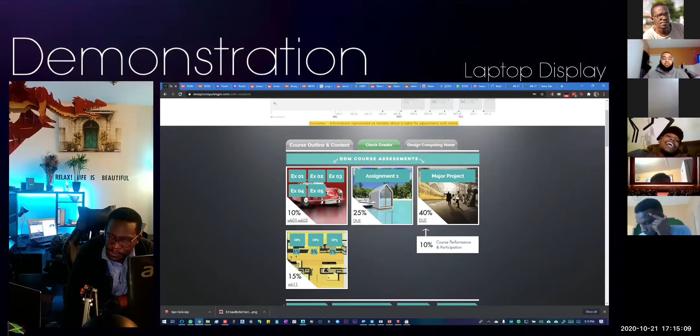Let me close some files here. I want you guys to open the class website. You guys with me? Yes sir. So if we take a look at the class website, and we're going to scroll down here, let's scroll down. I think it's on, yeah, it's under unit 3.

And we have some interesting sketches here. This is what we used in the previous year. Every year we keep adding a new one, so this year I added another one. And here it is, I want to show you guys this sketch. This is my new favorite sketch.

Now, why I love this is this accurately represents a quick sketch, something that you would whip up. Maybe you're conceptualizing an idea or something real quick in your design studio. It could just be some kind of work. I'm sure many of us have sketches like this, not necessarily of the same building, but you probably can quickly just mass up an idea real quick.

Now what I'll be showing you how to do is how to do a 3D sketch from an initial sketch using SketchUp, right? And then we're going to look at how we can reuse that sketch for maybe some of your interims, or to actually put on your final sheet when you want to illustrate the concepts that you went through.

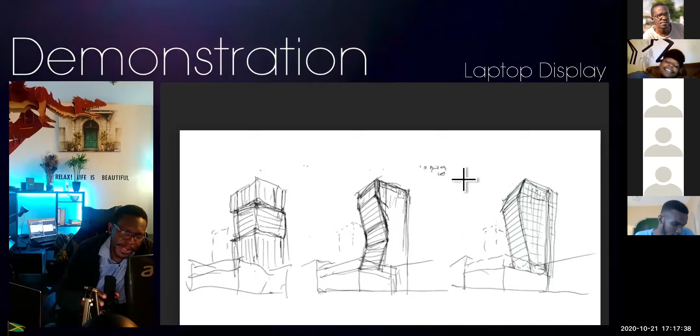So you guys aren't going to draw the model, because we're just going to use this sketch as is, sorry, so you guys are not going to do a sketch. We're just going to use this sketch as is and create a 3D sketch from this hand-drawn sketch. So what I want you guys to do is to open up SketchUp. Now, it's best that you use the Pro version for what we're going to be doing.

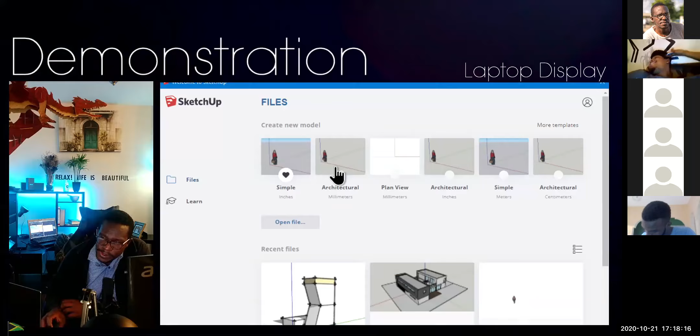So when we open up SketchUp, we'll go to architectural. Let's work with architectural millimeters.

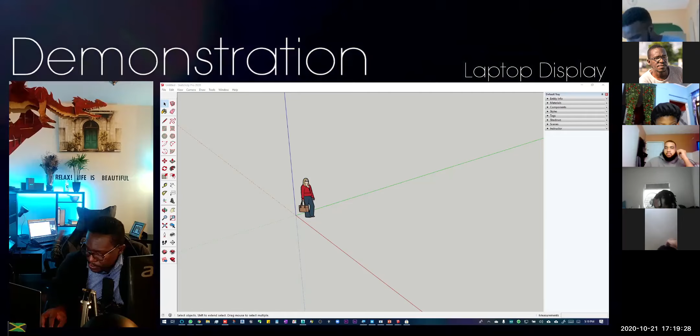Now let's take a look at our image. I'm going to open that up. Let's see... Desktop... Okay, here's the image. Let's put that over here.

Now, we're gonna try out this one, the one at the end this time. Let me use the other app for browsing that, the Windows Photo app. All right, so we're going to try out this one here. And what we're going to do is create a 3D sketch from this.

So I'll give you a minute to just open up SketchUp real quick.

Sir, what is Style Builder? Something like SketchUp? We're going to know that answer in a short while. We're going to look at style.

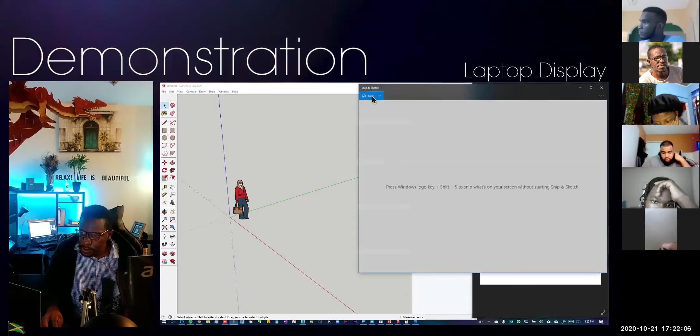No, not you. Okay. Now, when you open that up, the first thing we're going to do is a quick 3D sketch. Hang on one minute.

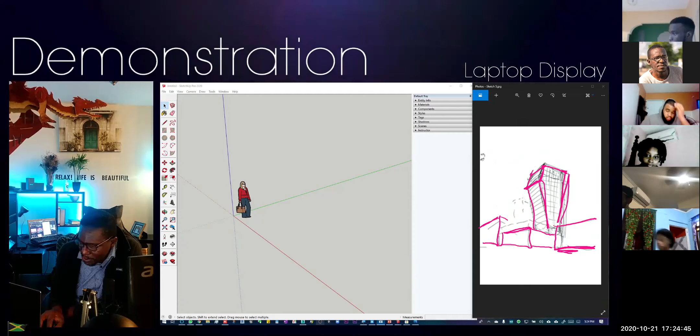And what I'm going to do to start off the sketch is use the rectangle tool. Let's say I'm going to do this box first, using my rectangle tool. Let's just clear that last one. Right, I'm just going to use my rectangle tool.

And this looks like this building is about so. And based on the height of this person, I'm going to use my push-pull tool, which is located here, to push it up. So this is about maybe...

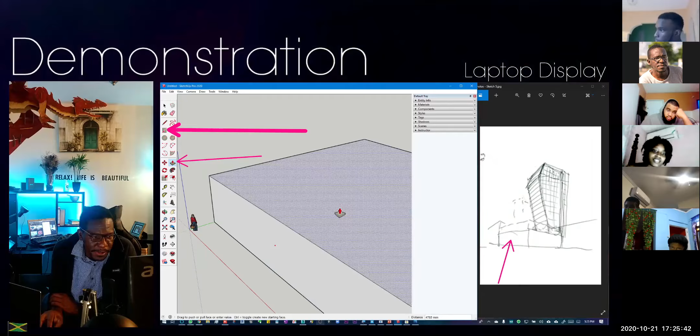Your screen is a bit small. Oh, it is small? It shouldn't be small, I didn't share my screen. Yes, I did. Oh, you mean... okay, let's go full screen. That's better? Yes sir. Right, plus I can zoom, right? So I use the push-pull tool here, right? No need to see my ugly face, right?

So what's the size of the base that you mean? Or just a random thing, that's the size? There is no size, look, we're doing it from a sketch.

So this technique that I'm showing you is: if you have an initial sketch for your concept, just a volume, just a massing, I want you to try out converting that sketch into a 3D sketch so that you can further explore your design options.

There's some people who do this and then they print it out again and sketch on top of it and create another 3D sketch and print it out again. And that's the process they use to come up with a design. You guys are going to have your own individual approach to this. So I'm just showing an option that you can build off of.

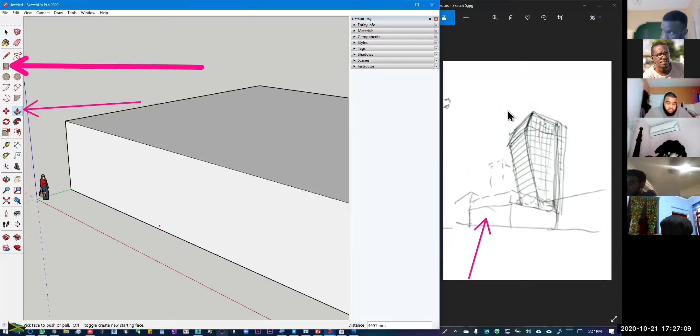So that's the first thing I created, the base here, right? And this is just an estimation. Now next, I'm going to create this building over here, that's this one over here. And I'm going to do that by drawing another base.

So I'm gonna, notice, just hover on the edge right here. Just kind of hover right here. So notice I'm getting that red line, that tells me that it is in line. And according to the sketch, it looks pretty close. I'm gonna start there and probably go to about maybe like here.

And this one is definitely taller. So I'm gonna use my push-pull tool and make this taller, about maybe that. So you can kind of see we're starting to look like our sketch already.

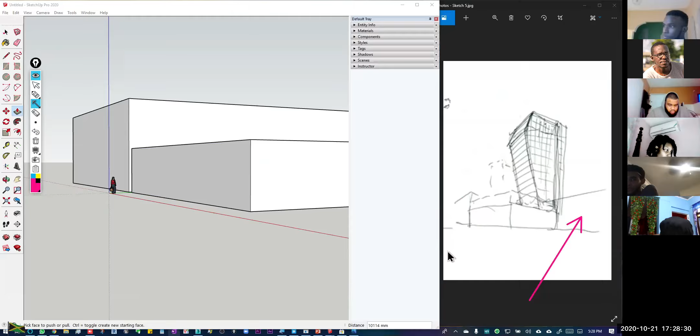Next, I'm going to work on this one here. And that's another box, but let's use another method. What I want us to do is copy one box to another.

So I'm going to just use my... So how did you do that thing again, where you ensure it's in the same path, same line as the other? You hover over the point that you want it aligned with. So I'm going to show you that.

So this time around, I'm going to actually copy this box. Let me just select this box here. I'm going to copy this box, and we're going to use the typical Control-C, Control-V. And paste — and what do you know, you have another box. Now, you're asking about the aligning thing.

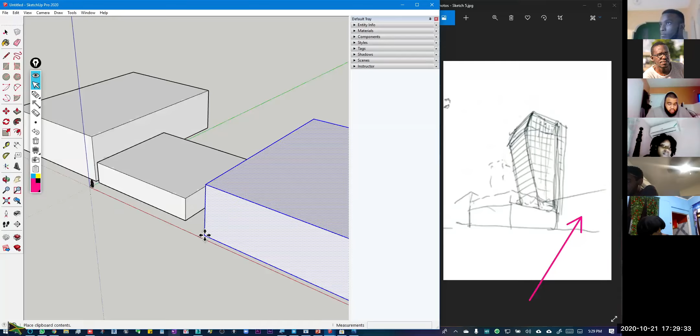Now, if I want to align this, what I'm going to do is hover over this point. Don't click, just hover over it, then slowly pull it away, and it will give you the line. So I'm going to put this about here.

It looks like this side is further away. This building is definitely not so tall, so I'm going to use the push-pull tool like that, and push it down till about there. So you can see that we're starting to look like this.

Now let's look at this building here that we sketched out. Remember, all of this started because we have an idea of how tall the building is, because we use this person as an estimate. And then we just use our own sketch as an estimate to get the positions of these, right? Remember, it's a 3D sketch, so we just need to be proportionally reasonable. Let's put it that way.

All right. Now let us work on this guy now. Of course, we don't know what's happening behind here, right? But let's assume the base of this starts from around here. So I'm going to draw a base like that.

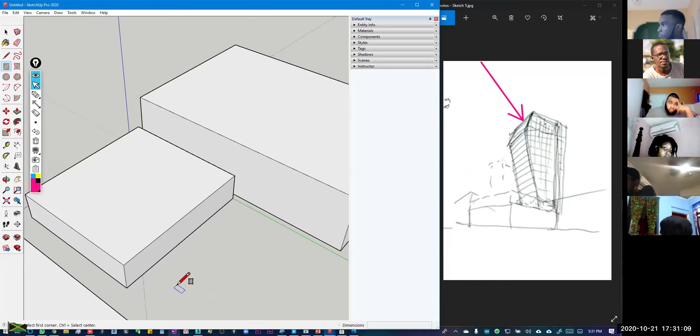I'm going to do a push-pull, but I'm going to now extend this by another push-pull into here. So maybe that's the base — I don't know, I'm just doing a rough estimate. And then from here now, we want to start extruding upwards, so we're going to push this all the way up like that. So essentially we start having our tower like that.

Now naturally, you can see that the tower has that kind of shape, so we basically need to be cutting something out of it like that in order for it to start looking great. So there are a couple ways to do that. I'm going to show you one way.

One way that you could do it is by using your pencil tool. Let me just respond to this.

I'm telling Miss Oti that you guys are still alive.

All right, so one way that you could do this is you could draw a line from here. Let's estimate it till about here. And that line would be represented — pretty much that line there.

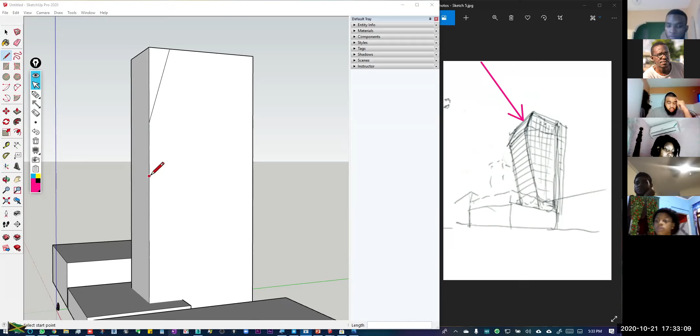She's saying that she's supposed to give you guys some links, Miss Oti. Is that so? Don't know, sir. No? I don't know.

Okay, all right, let's finish this.

Now, we would want to start the base from here. Now, this is where we start going into the unknown of our sketch, right? Because we just kind of sketched this out, we don't really know what's happening behind here. Because we're sketching it in 3D, we're forced to figure that out, which is a good thing because it helps you flesh out your design. So I'm going to join this line to here, and there we have our kind of sketch there.

Then what we want to do is perhaps get rid of here. Sketch this out — ideally we would want to get rid of that, and get rid of that. You guys following me so far? Yes, sir. No, sir, go ahead.

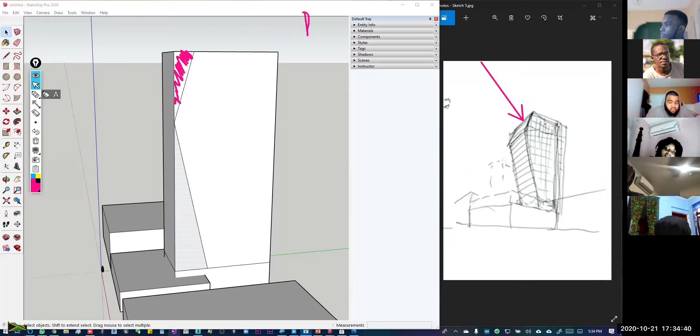Yes, sir. So one way how we could do that is we could use our push-pull tool again, right? And remember that is this tool right here.

And we can actually grab this edge here, and just like how we would push it this way, we can actually push it inward until it cancels out itself. By the way, this looks kind of nice, this kind of shape here. You know what? I like it. I'm just going to make it stay. But I'm going to cut the top by pushing it all the way over here like that.

And that's the beauty when we try to sketch out a sketch that we've done. In doing it, we kind of discover other interesting things that we can do at the same time. So it looks like we have a kind of elevator shaft business happening on the right-hand side. So let's drop that in.

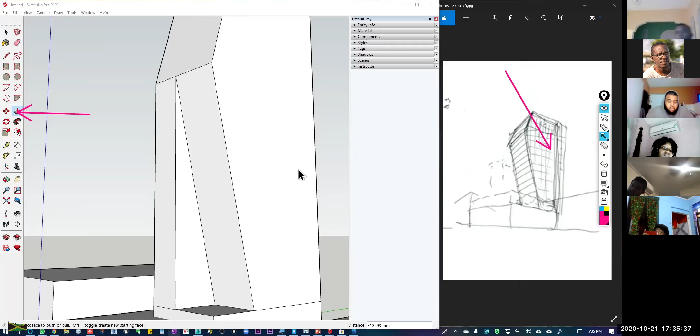So to do that, we could go for the rectangle tool, but why use a rectangle? Let's use our circle tool to make it interesting. I'm going to just draw a circle like that. And then we're going to use the push-pull tool again and just push this up. So that's pretty interesting.

And there you have it. It's basically sketching out something from a 2D sketch that we didn't know what's happening for the other sides, but in sketching it out, we were able to visualize it a bit better. We can look around the back, and then we can start to explore other things.

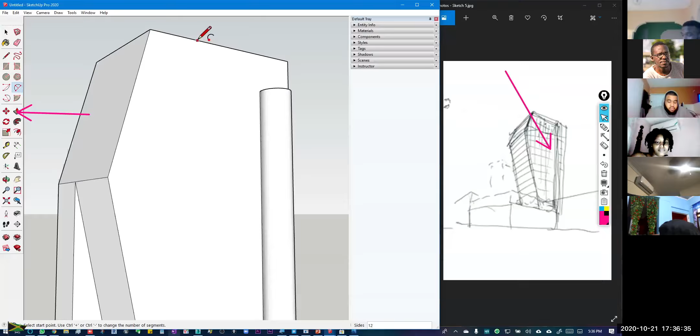For example, suppose we wanted to curve this edge here. We could use like a 3-point curve. You don't have to follow what I'm doing. I'm just kind of highlighting a nice way that you can start to explore your design by doing a 3D sketch. We could do an interesting thing like that.

Now it starts to look kind of like some kind of Iron Man transforming headquarters. Or, look, it looks like Squidward's house in SpongeBob.

Oh, all right. But you can really, just by doing some basic drawings, for example, we could just draw this back up to this point here. And we could draw this around there. But we can really start to explore some interesting shapes because we created a 3D sketch from this.

And this is one of the reasons I love SketchUp, is because you can do this so quickly without having to exert much effort in doing this, right?

Now, for the assignment, you won't be needing to do a 3D sketch necessarily. So I'm just going to move right into what you will be needing to know. This was just like a bonus item to you guys, right?

Now, we are going to investigate another aspect of SketchUp, which is adding materials. So if you notice this panel that you see here, which is called the tray, if you don't see the panel enabled, to enable it, you will go to Window, and then you're going to enable the default tray. See, it's a hide tray. So mine is shown, but if it wasn't shown, then I would have to choose Show Tray. So if you don't have it on, that's what you do.

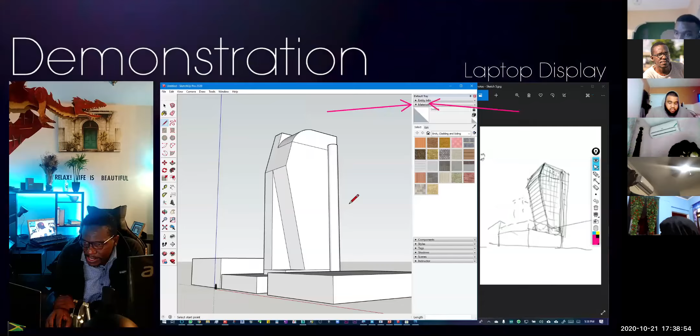And we are going to go to the Materials tab to expand that down. So from this 3D sketch, now we can actually start exploring colors and materials, even if it's just for diagrammatic purposes. So for example, let's say that this is some penthouse unit at the top, right? So we wanted to color it a color to say, okay, this is a private space.

Then what you would do when you go to your materials tab, you would expand this and you would go to colors, that's here. And you will see it pretty much shows the spectrum going from white to black all the way to white, and through the color spectrum of the primary colors. So ideally, you should be able to get any color range in this.

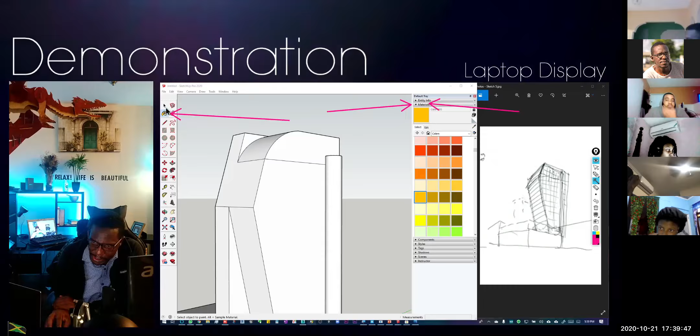So let's say we wanted to represent this as an orange. So we click orange, and then we go to our paint bucket tool, which is here. And when we go to the paint bucket tool, we simply just fill in the areas that we want to fill. And it's really as simple as that.

So if we wanted to color this section different, for example, if we fill this, all of this will be filled. But if we wanted to color this section different, we would go to our pencil tool, draw a line here, and then go back to our paint bucket tool and fill.

So that's interesting. Maybe you want to represent glass on one side. So we choose blue and we fill that with blue.

Remember, this is really a kind of a sketch, and it's kind of like you've come this far with the hand drawing and then you explore further with a sketch. And what some people would do, some people just print this out and then sketch again on top of this. You know, you would choose your own design method, whether you want to explore with your hands using a hand drawing tool, or you want to just convert to digital and continue exploring this in a digital way.

It's recommended that you have a 3D sketching option. Your options for doing that are SketchUp and FormIt - those are the two quick ones. It's not recommended that you use architectural software to do sketching. When you use a program like SketchUp, you're not worried about windows or doors just yet - you're really just considering proportion, massing, and volumes.

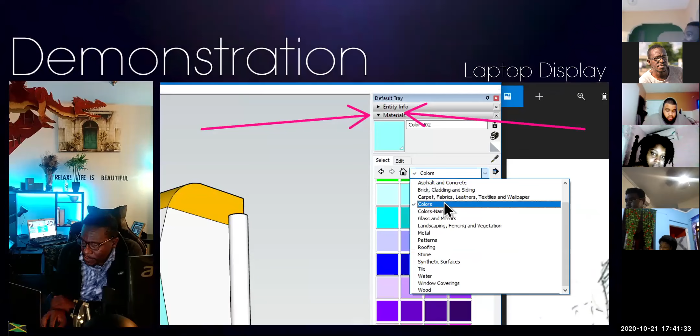So that is where you apply material, at least color. To apply material, you just change it to a material. These materials are built into SketchUp - if you're not seeing it, it's probably based on your version. So you could choose tile, for example, choose that type of tile, and then fill a surface with it.

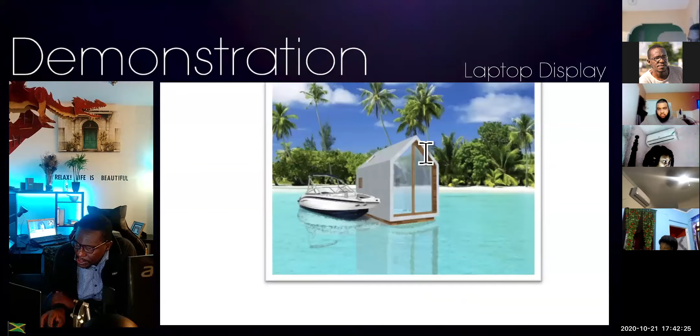If you take a look at the assignment, you will notice that in the final production it does have material. Let me get you a bigger picture - go back to the website and click on assignment 1. There we go, actually I can show you on the cover page - notice it has material here. So you guys will be needing to add material as well.

And that is how you would apply materials. Ah, come on. Hold on, this thing just slightly froze a while ago because I pressed a button. Come on, oh Lord. It's coming back, it's coming back - just let it do its thing. Sometimes when I have a lot of stuff open and I switch to multiple desktop mode in Windows...

If you want to, for example, move one of the rectangular members, can you shift it? Well hold on, we're coming to that. Three buildings - can you shift one of them to the side? We are coming to that in the latter part of our practical.

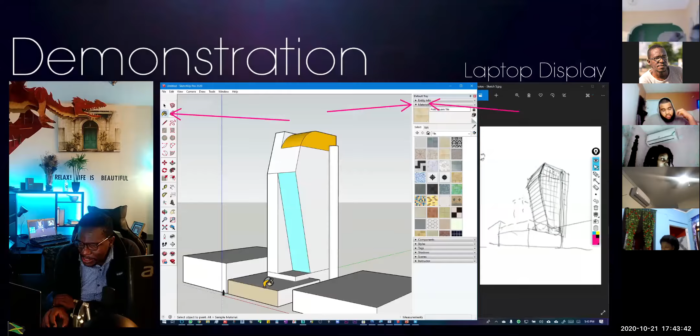Right, so this is the application of materials. Now if you wanted to apply your own materials, you would go to edit, and you will see from editing you're able to select a color. Let's say I wanted a weird shocking color green - you can see it applied there. Then what you can do is save this as a new material by clicking the create material button.

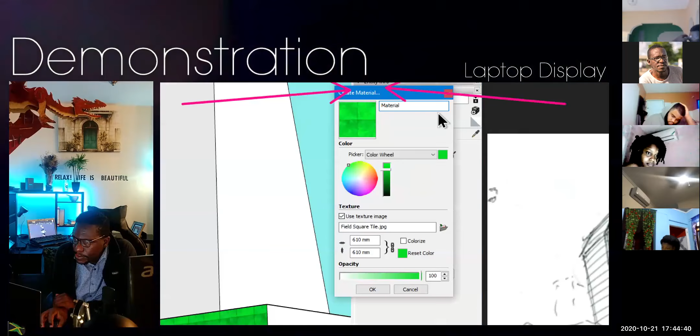Now, you can also pipette materials like in Photoshop. In the materials tab, notice you see a pipette icon here. When I click this, I can actually absorb this material and then apply it elsewhere. So that is pretty interesting - that's what you can do there.

So that is material in a nutshell. In a hard and fast way, you can quickly apply materials to your model - maybe you want to color code private and public spaces, or represent a particular room or circulation. It's up to you. Now another important aspect you'll need to know to finish your assignment is the styles menu.

There's a lot of stuff in SketchUp, but I'm only going to show you a few. Go to styles here. Now if you expand styles, you will notice a bunch of options for ways that you can represent the model, right? This is where SketchUp begins to shine - for example, I could pick from a list of styles.

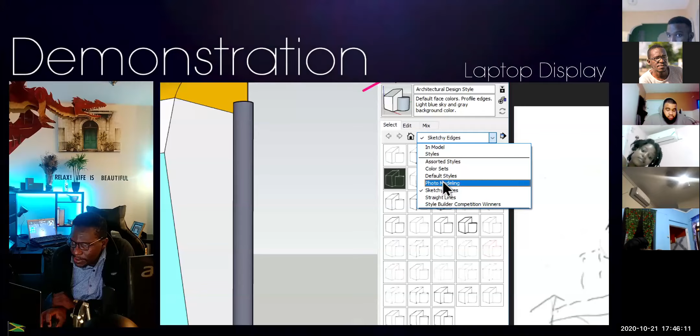Let me go to Sketchy Edges. So you're probably on default styles, which is that. You're going to switch to Sketchy Edges, and let me change it to white with black ink. It's still full 3D, but yet it looks like a sketch - look at the line work, everybody can see that? It looks pretty much like a sketch, but it's still full 3D that you can orbit around. There's another one.

This looks, so you could change this to like a hand sketch, save this out, print it out and show it at your interim and say, hey, look what I sketched. Don't say you heard it from me, all right?

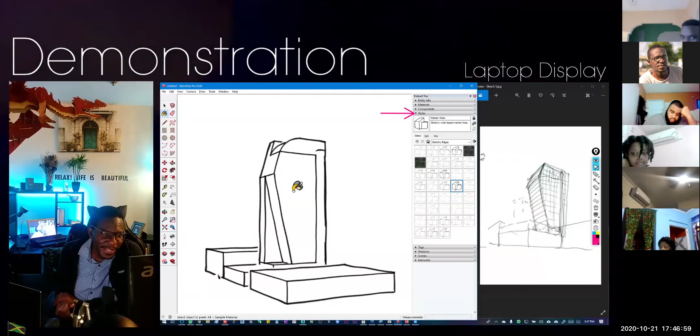But this is pretty convincing for a sketch. You understand? So you can imagine how instead of worrying about sketching this out in different ways, you could just sketch this to a particular detail level and then start to explore it in 3D.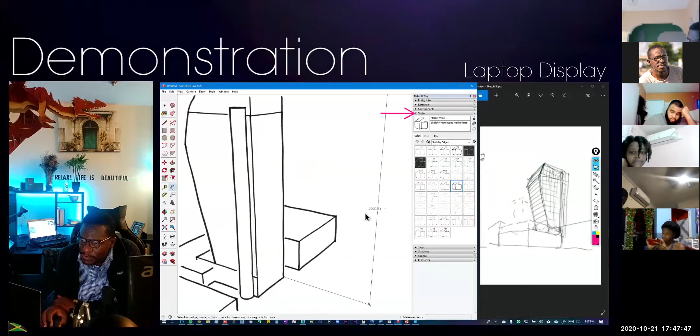Now the beauty of this is that when you're ready to extract measurements, you can, because you can just freely start to draw, and then you might say to yourself, I wonder how tall this building is based on this sketch that I did. Well, you just jump to your dimension tool and take the dimension. You can see that it's 55,000 millimeters tall. And it's a reasonable estimation, because remember that this is the height of one person, so it's reasonable to say this is about 55,000 millimeters.

So the 3D sketching is actually very useful if you learn how to create your own design workflow, and you decide how much of real sketching you want to do and how much of 3D sketching you want to do, and how you want to combine those two together.

All right, now in addition to this, you can create your own style. Let me just choose another style just so you can see the impact. So if I go to the style builder competition winners category.

So if I click on this style, this is kind of like a canvas paper sketch. And that's pretty cool because it even, you can see where it doubles up. When you're sketching and you have that kind of double line, it even has that as well.

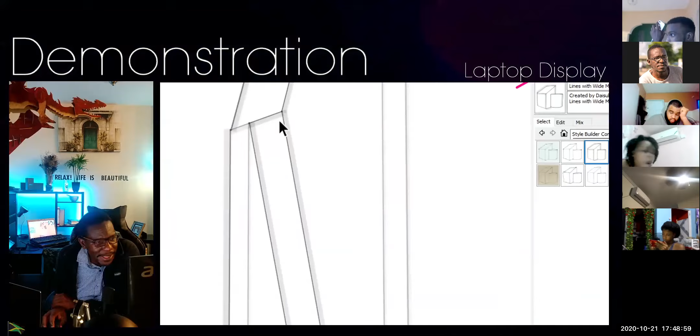It has this one that looks like a marker, like using a Prismacolor marker, and you've outlined it with pen while using the marker. So these are actually pretty interesting styles that you can use to really quickly conceptually show off your architectural concept.

Now, in order to do the assignment, you will have to know how to create your own style. So for example, I'm going to go back to the default style, which is that. When you open SketchUp, it pretty much looks like that.

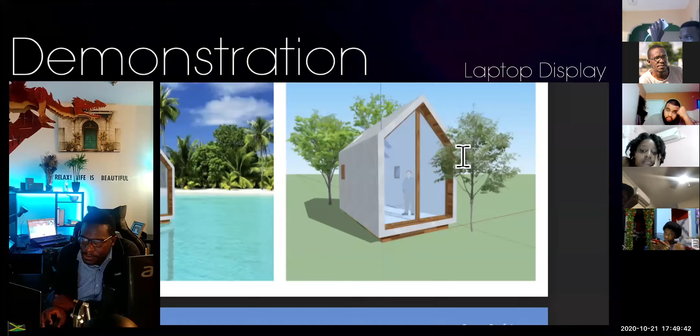Now notice in the assignment that the model that is shown here has no outline. Everybody seen that? So it doesn't look cartoony. Instead... I mean, it doesn't look... so it's a cartoon to me, I love cartoons. Meaning this looks more cartoony because it has these outlines. So you know context.

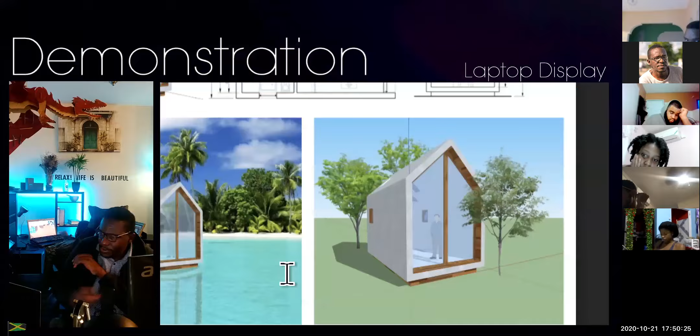No, it would have no outline. When you say context, no, so this doesn't look cartoony because of no outlines, the other one has outlines so it looks cartoony. But notice, all drawings are cartoony on the computer, but notice this: when you look at this, the line work itself doesn't have an outline. Look on the edges here, it doesn't have an outline. Versus what you see in SketchUp here, where these have an outline.

So what it is, is a style of representing your model. And that style isn't a style that is pre-made, you have to now configure that style. So you guys will have to configure that. Now to do that, what you would need to do is go to edit.

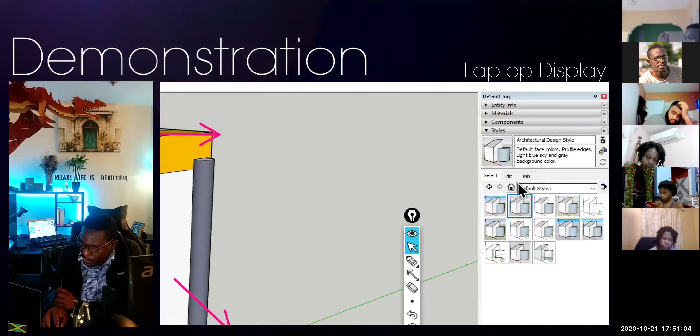And this is where you can now change your edges, your faces, your backgrounds, and you can even add watermarks, and you can turn off grids and those things. So for example, you can customize and say that here the edges, you want no edges, so you can actually turn that off. And when you turn that off, then the edges go away. You can say you don't want any profile, and when you turn that off, the profiles go away.

Everybody seen that? So you can enable jitter. Well, you need to enable edges in order to see jitter. And that's what jitter is. Jitter is basically making the lines kind of jittery. You can have, for example, extensions.

Let me show you what that is. So let me extend it like 20. You see these extensions that are coming off here? So you can actually edit how the edges are displayed by changing those settings. And if you look, that is what you have at the end. So that is pretty interesting.

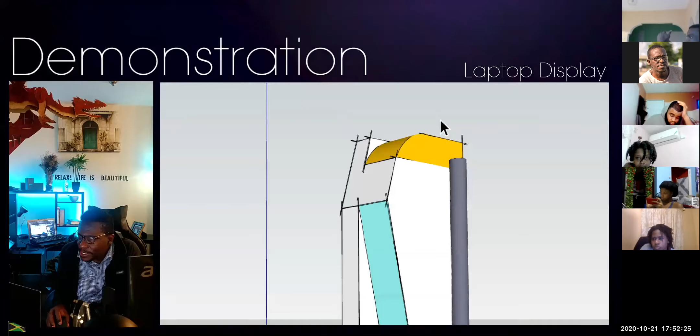Now you can also change faces. So for example, you can say you want it to be completely wireframe, and then what you have is a wireframe model. Or you might say that you want it to be shaded mode, or hidden line mode, where you're not able to see through the model, but at the same time the model doesn't have any materials.

You might also want to change it to say shaded mode, which is what you're used to. This is showing materials.

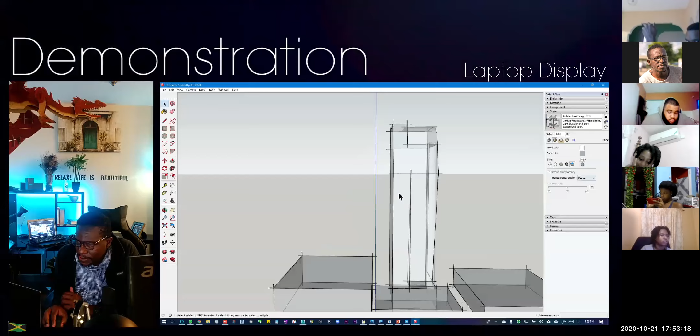Using textures, or check this out, X-ray mode, which shows a semi-transparent, see-through view inside your objects. That's pretty interesting. Imagine you're trying to highlight something inside of this model, and you can use this mode here.

This style mode you realize you can completely customize by going into the styles here. That is essentially what you do with the style editor. You can create styles and save them, because you might have a particular way you want your SketchUp models to look. You configure your own style, save it, and it shows up here as a style in this listing. So that is what the style editor is for.

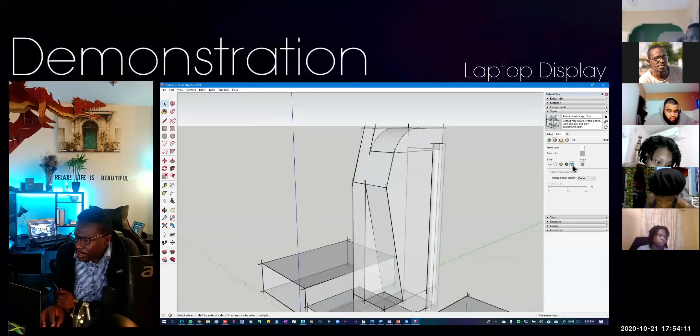Now I want to show you one other interesting thing. Check this out, I'm going to turn on back materials here. Additionally, you can also change the background of SketchUp. For example, you can choose to have no sky or sky and ground, and then you can choose the color of the sky and ground.

For example, I'm able to say for sky, how about an orange sky. You choose that and the sky changes to orange. You can change the ground to maybe a deep gray, and it changes the ground there. Or you can actually turn these off and change your background to white, and it will just look like that.

Now I want you guys to enable shadows, and where you go to enable shadows is right here. So that's your shadow tab there. All you need to do is click it, and then click this button to enable shadows, and there you go. You now have your shadows, and you adjust them by time of day or month.

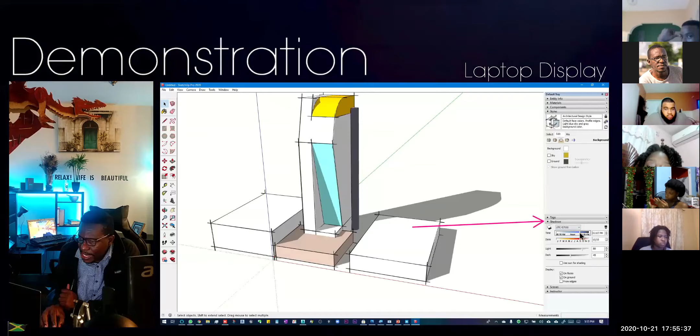I know it would be good that you had known this before your climate project, right? Okay, good. But this has to exist somewhere, right? So in order for this north to be true, your building has to actually be located somewhere on a site so you can orient it and hence plot accurate shadows. Makes sense, right?

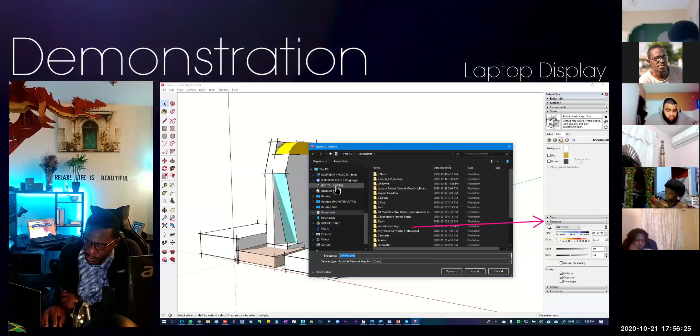Yes, sir. Now let me show you one other awesome thing that you can do. I can go to File and go to Export as 2D graphic. You would have done this with your Lego brick, but I want to show you this other option to export. I'm going to export it as a PNG file. There we go.

And you all know the advantage with a PNG file, right? What's the advantage with a PNG file? What special trait does a PNG file have? You're muted. It doesn't have a background.

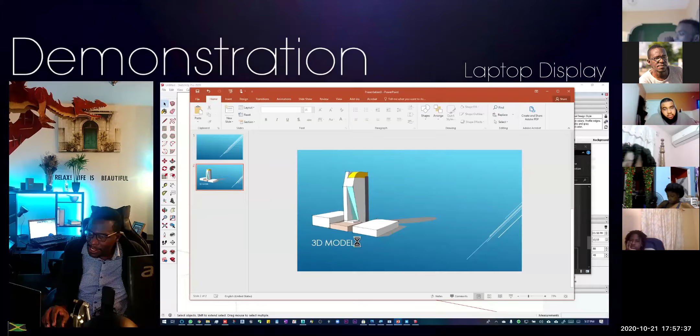Exactly. So if I browse to my desktop where I saved this picture, and this is PowerPoint, I drag this into PowerPoint, then what we have is a nice model here without any background, and it keeps the shadows. That is pretty cool. And look, it even retained our style with all of the little edges with the line work and all of that. And voila, you could have a nice presentation just like that. What happened, computer?

What did you do? Sir, I have a question. Sir, how do you get back the original style that you had?

Okay, so to get back the original style, you would go to the, okay, there we go, right. Before I answer your question, when you're exporting these models, be sure that when you choose File and Export, there is an options dialog box, and this is where you choose to retain the transparent background.

So you have to ensure that you choose this, which is only available in the Pro version. You can also choose the resolution. Remember, if you don't change this setting, it will default to the resolution of your screen. My screen is not 3000 by 1800 pixels, it's less. But what I did was just put in what I want the resolution to be. So you want to always increase that resolution.

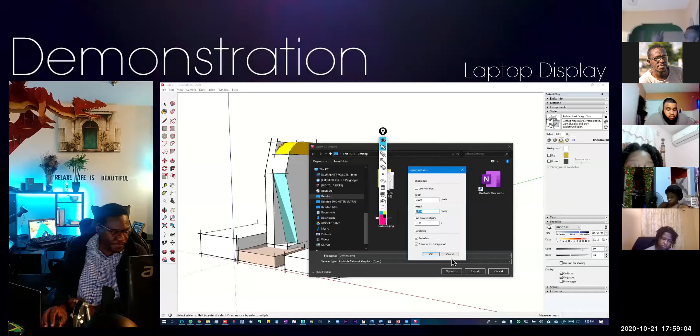And you want to enable anti-aliasing so you have nice smooth lines, and you want to enable transparent background so that you can remove the background in a PNG file. So that is all pretty cool.

But for your assignment, the style that you need to create is a style that has no outline. Right? So no outlines, no profile. This is the style that you should be creating for your final.

Yes, sir. Are those the option to make the transparent background? It might be a version of SketchUp. No, sir, I have the Pro version. Right, so when you go to File and go to Export and go to Options, you're not seeing it? The only thing I see is image size, rendering, and JPEG compression. No, man, you have to choose PNG, I think. Yeah, oh PNG, oh sorry.

Right, and then you look in options, it should be there, because remember, it's only PNG files that would have transparent backgrounds. Okay, so make a note: this is the style that you should be using for the assignment.

So there we learn about styles and materials in SketchUp.

Now, one last thing before we go. This class isn't going to be that long, because I need you guys to actually start the assignment. You only have 2 weeks, and next week we're going to talk about image compositing in Photoshop, putting the 3D model into a 2D background so it looks like it belongs there. But you need to have your model for us to do that. So what I'm going to do now is start you off on creating the assignment model.

After you choose the shadows and, for example, the time or date, when do the shadows appear? Oh, you have to click the enable button. The enable button is right here. Show, hide shadows.

I have another really good tip for you guys, especially for architecture. Usually in architecture, when we represent entourage, sometimes we do silhouettes. So let me Google an entourage you want to use. How about human? Entourage, will I get that? Oh, that's pretty cool.

Let me go to images and apply what I learned from you guys. I'm going to go to tools, color, and choose transparent color. Check this out - sometimes we want to use these kinds of silhouettes, and sometimes we use actual models. But let's say we want to use a silhouette here.

Let me show you something really cool with SketchUp. I'm going to save this file as a PNG file, and it's saved to my desktop. Check this out - I can just drag it straight from my desktop into SketchUp, just like that, and it will come in as a billboarded object. What do I mean by that? Meaning it's really flat, like a billboard.

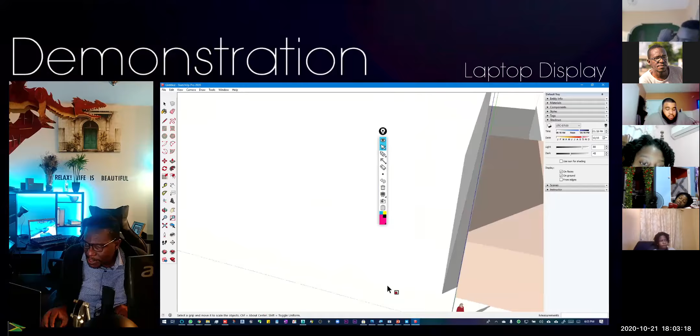Depending on how you drag it in, it might come in differently. Let's scale this down because it's ridiculously big. Say for example I wanted to bring in a tree - I had downloaded one earlier. Here is my PNG tree. I can just drag it into the scene, and there you go. SketchUp will automatically create a plane and apply the image to it.

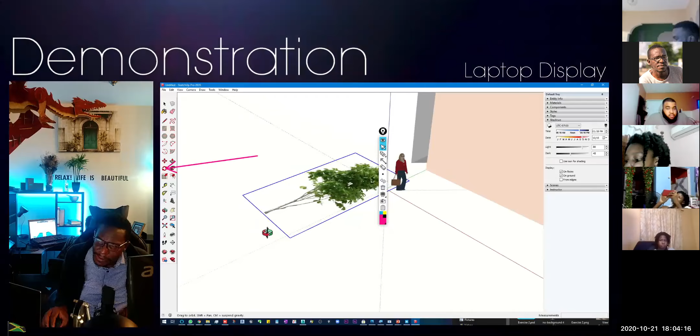But let's say it comes in flat and you need to rotate it. Then you'd grab the rotate tool, which is here. Of course if you click here to rotate it, it will rotate the wrong way. So an interesting trick in SketchUp is to angle your view to see the horizon, so your compass changes to that view. Then hold shift and put it right at the corner here - this is a neat trick to turn it vertical.

Now, to move these around, you use your move tool - click on the object with the selection tool, then use the move tool to move it around. Let's use the scale tool to scale this guy down. Yeah, that's looking more reasonable now.

Now, the reason I show you this is for when you do your assignment. Oops, did I close it by mistake? There we go.

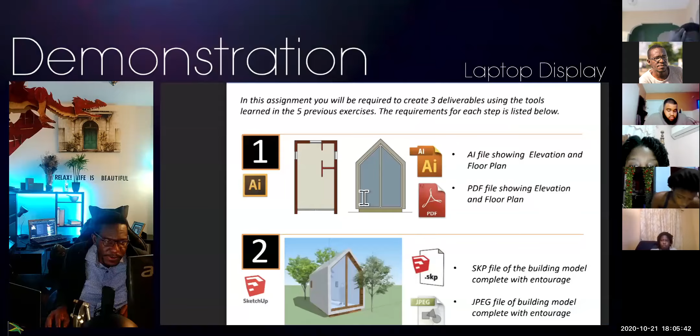When you do your assignment, notice there are 3 things you're supposed to hand in. You hand in the AI file with the 2D trace of the elevation and plan, the 3D model - where you can see these trees like the ones here, this is how you get the trees in - and the Photoshop file with the composite, which we'll do next week. But by next week, everybody should already have their model built. I don't need to show you how to trace this in Illustrator, since you would have done that in exercise 4 already.

And you are given the plans to actually do that. The plans are in the assignment file. Okay, great. So you've learned how to do this. Now, what I want you to do is allow you guys to start your assignment now.

Now, when you go to the website, notice that on the right-hand side, these are files related to the assignment. You'll notice I placed a cheat sheet here. I call it a cheat sheet because I want you to feel like you're cheating if you use it, because I want you guys to figure out how to model on your own. But I have this cheat sheet here.

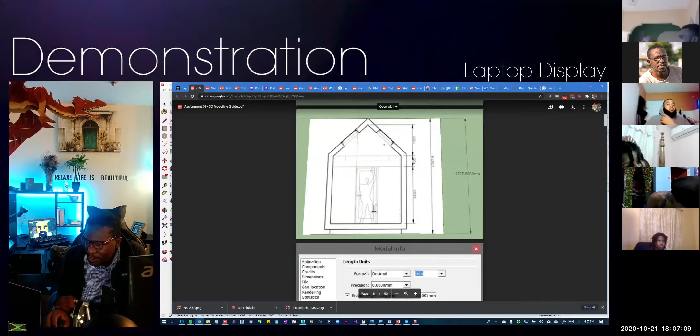It's called a 3D modeling guide, but it's really a cheat sheet. If you open it up, you'll see it's like a guide for how to create the model. The tricky thing is that because of the pandemic, you guys have an actual video you can refer to. Under normal circumstances, you'd have come to the lab and then left, with no video to watch later. So the only thing to depend on would be this cheat sheet. But now you guys can even cheat more because you can go back and watch the video.

That means I should not post a video, right? But don't be ridiculous, sir.

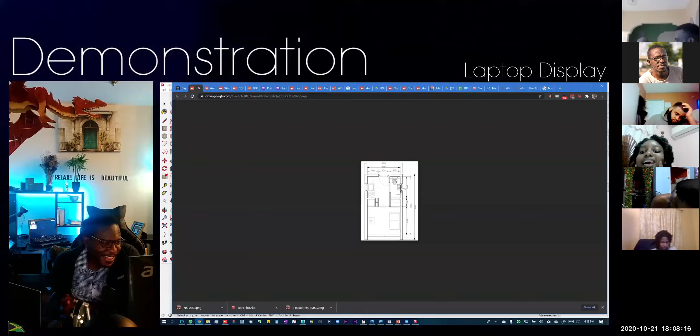Sir, so I have a question here, right? Yes, the question. You're saying it's a cheat sheet. So if I decide to model my model into a perfectly cube building with an opening at the front with glass, nothing wrong. You can't fail me for it because you never told me. Because obviously I'm supposed to look at this class.

Right, so you have a plan and you have an elevation. I'm not seeing an elevation. You have a section, yeah, you have a section and you have a plan. Oh, those are the two files you are given. On the right-hand side, you're given a plan, elevation, and a 3D view. And from those, you guys would have to draw this.

So what I want to do now is get you started on it. I want you guys to open a new file. I'm going to close this file, and I want you to open a new SketchUp file. You're going to choose architectural millimeters because that's what this is in. Here we go, architectural millimeters.

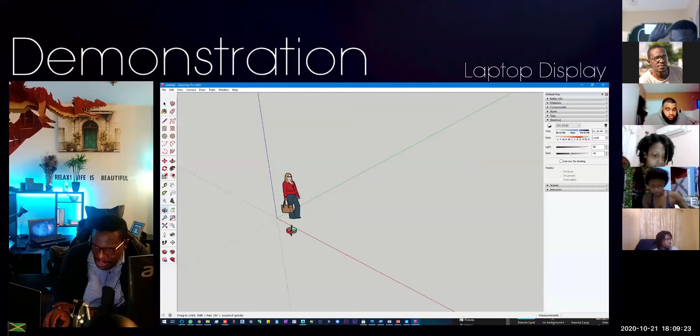And I want to introduce you guys to another way of modeling. Whenever you're modeling and you have a photo or some kind of reference image, I want you from here on out, because of how easy SketchUp is, to download those files. Those are the drawing files. So I've downloaded mine here.

Where is it? Sir, one minute before you run. If you want to save the work we just did a while ago, save it as SKP, a SketchUp SKP, right? Okay, good.

Good, so I'm going to download the plan. Now, the great thing about this is that because it's SketchUp, I can actually just drag that plan I've downloaded directly into SketchUp, and right then and there you have your plan. And I'm going to do the same thing for the elevation. I'm going to download the elevation and just drag it right there in SketchUp.

Now, one thing you'll notice is that they are not scaled. If I measure the width of this dimension here using my dimension tool, notice I'm getting like 400, 450 millimeters thereabout. So this is obviously not scaled. So the first thing you want to do is scale this. For those of you following along, I want you to do this with me.

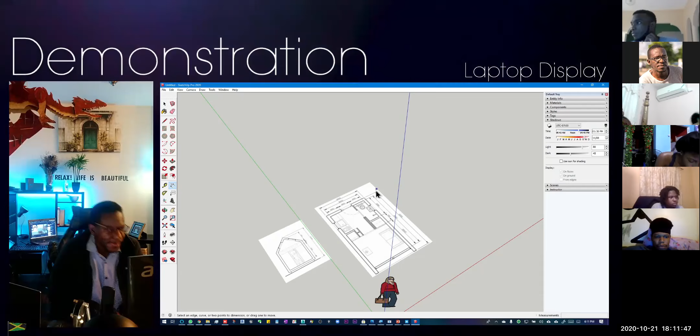Now you might say, how do we get this thing to be scaled? Because we can always use a scale tool, but how do we know what's the actual length? So this is what I want you guys to use for this technique.

I want you to use your pencil tool, and you're going to start from here, and draw a line this way. This line should be 3050. So I'm going to write 3050, press enter. So this is how long 3050 should be.

Then I'm going to draw a line from here down, and notice that it's turning green. That is important. That's how you know that the line is straight, right? So you need to look out for that. And this should be 5,500.

Oops, I moved it by mistake. Oh man, it's leaning. Let me undo that. Let me go again to the pencil tool. Here, 5,500. There we go.

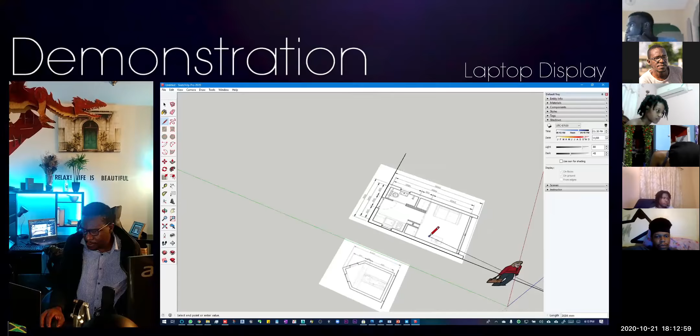So obviously, this is not the correct length. I can get rid of this already in this case. So what I need to do now is grab my scale tool, and I'm just going to eyeball this.

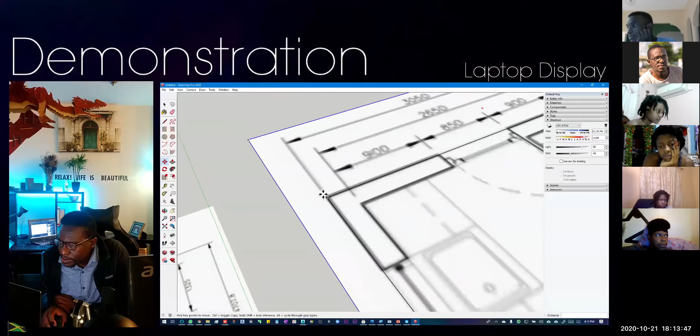I'm going to use my move tool, and put this back. Oops, put it back right there. It's a bit too big now, so I'm going to scale it down a little, maybe like that. Let me use my move tool again, grab it at the corner here and put it right here. All right, lovely, so it's scaled now.

So if I use a dimension line and measure this point to this point, notice that I get 3050, and that is looking like what is in the sketch. Everybody see that?

So I'm going to do it again. Let's do it for this elevation. This elevation should be 4707.8. So what I'm going to do is use my pencil tool, and draw a line at the base.

Make sure that it's highlighted in a color. So this is the x-axis because it's red, so I know that it's straight. And then I'm going to draw a line from the center of this, or the apparent center, down to this line. So what this is saying is that this height should measure 4707.8.

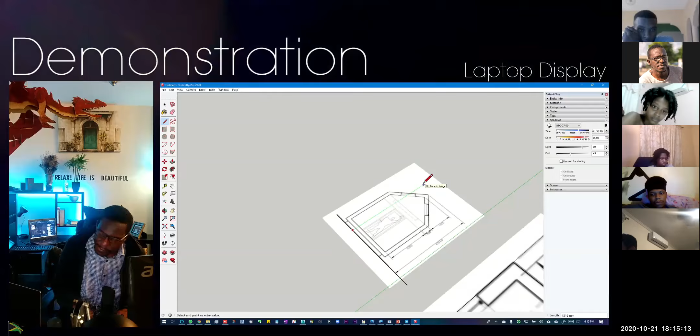Of course, right now it doesn't measure that. Right now it's like 14 or something. What I'm going to do is delete this line here. I'm going to use my pencil tool and start anywhere at the baseline, and type 4707.8, enter. So this should be about this tall.

So I'm going to do the same thing again. I'll select the shape here and use my scale tool, and attempt to scale this up. I'm just going to eyeball it. That's the best that you can do because it is a picture.

It's not a vector where you get lines, so it's never going to be perfect. There we go. Yeah, that looks like about it.

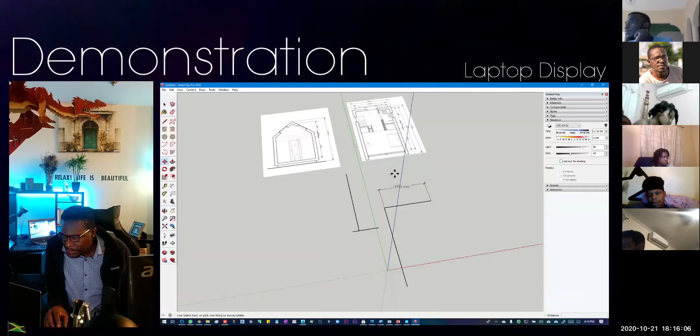Good. Now, once that is there, I can always move this away. And I can move this away. Now you might be saying, okay, why did I scale it and I have dimensions?

Because important, guys, I don't expect anybody to draw based on tracing these dimensions that you have already. Let me repeat: even though this is scaled, I don't expect you guys to be tracing measurements that is represented here already, because it won't be accurate. If I just look at this and draw a line from here to here, it's not going to necessarily measure 3050.

Now, the reason why you have this scaled is because there are measurements that you don't have. So for example, what is the distance inside this little storage space, or maybe it's a utility space? We don't know, so the best you can do is trace it. But I would expect everybody's building for these measurements should be 100% the same.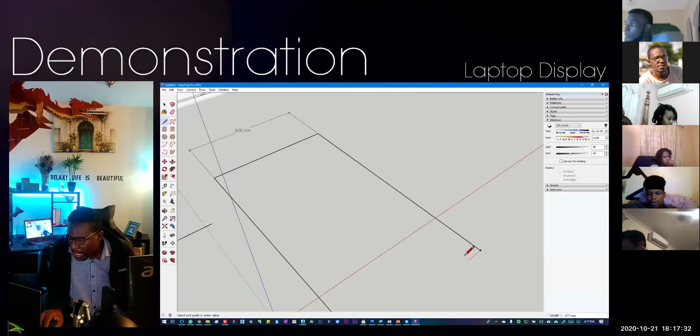So therefore, when I start drawing, I'm not really basing it off of the sketch. I'm actually drawing based off dimensions. So for example, over here, there we go. And if I do the math, I can see that 3050 minus 2860, and divide that by 2, I'm able to get the dimensions on each side. I should get 200 for the thickness of the wall.

So I'll put 200, I'll go up here like that. I'm just going to make it a little longer like that. Good. And then I can go here and go 200, and I'll go up here like that.

And I could just copy this, 200. Now actually, or I could just draw a reference line, or I could use my tape, remember that tool that we use here, the tape tool, make this 200. There we go. And then I can use my pencil here and there. I can use my eraser tool and delete that line, delete that line, delete that line, and delete that.

And of course, from here, I can start push pulling upward. Now, if I line this back up, I'm going to pick that point here and line it up back here. That's what it should look like. But I'm not drawing this based off tracing, I'm drawing it based off actual measurements.

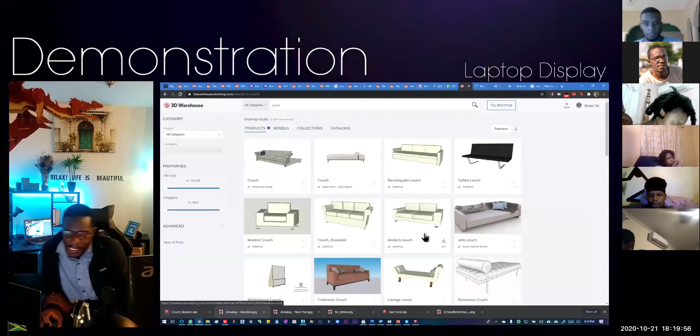You might be saying, what if it doesn't give you the right version, what if it gives you 2017 and you have SketchUp 2015? Well, my best advice is to ask somebody to save it down for you. So check this out. Now that I've downloaded this couch, I can just drag it directly into SketchUp. There we go. So that's pretty cool, I can use my rotate tool and rotate it 90 degrees.

Let's use the move tool and I can move it in place. However, this couch is really big, so I could just use my scale tool and scale it down diagonally so that it matches the drawing here. So that's how I expect you guys to get in these elements by not modeling it. But the building itself has to be modeled.

Now that brings me to an important tip that I need to show you. And I'm going to demonstrate it with some boxes here.

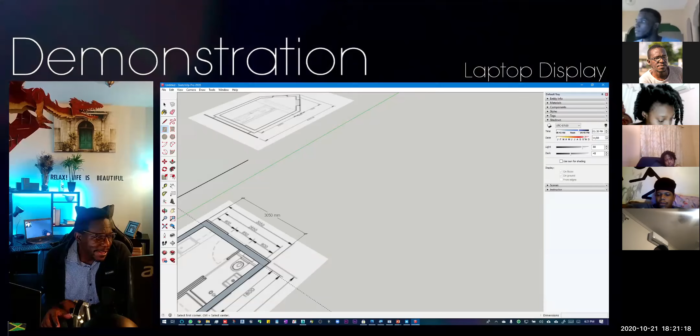All right, so you guys need to take a note here, definitely for this, because this will annoy you while you're modeling. And I don't want you, for those of you who have these, to tear them out. All right? Even more than we probably are already tearing them out. Right, Candice?

Okay, so check this out. Now, let's say you have a box like this, right? And I'm going to push pull it, right? Remember, watch closely, guys, this is important. This is called, I call this the sticky fingers act. You know, like how you have acts, like different rules. So in SketchUp, I call this the sticky fingers act.

Now, if I have an object like this, and I select the entire object, and I copy it, Control C, Control V, and I paste it, then I have another object here. Fair enough? However, if I decide that, okay, I want to move this object, so I'm going to use my move tool, and I want to place this object right beside this object like here.

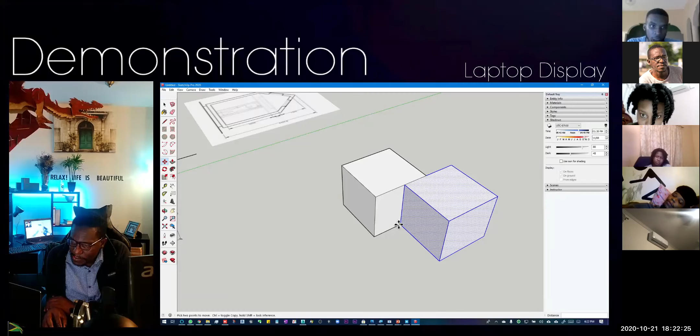And then I change my mind. I say, okay, I don't want it there, I want to move it. Then when you try and move it, what happens? It's stuck, right? Hence why I call it sticky fingers. Now in SketchUp, once you make two solids touch, they get stuck immediately. They have now fused into one. Even though you see this line here, they are still stuck.

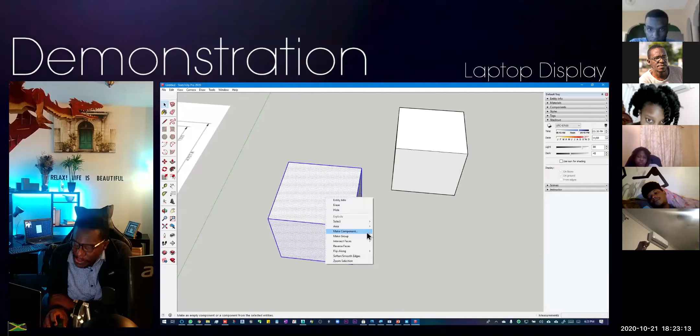So you might be saying, but that's so stupid. But actually, in some cases, you want that. Now, how you combat this is, you have to make it a group. Yeah, I was saying you just group them. Right, you just group them. So you will highlight this and right click, and you might notice you see group and then you see component. So let's make it a group.

Now, once this object is a group, if I try and move it using my move tool here, paste it there, it will remain as an independent object. Here, right, it will remain as an independent object. So even if I stick it right there, it will still be able to move, which is great.

So, you know, I can put one there, and I can copy it and paste it. I can put another one there, and put another one, oops, there. I can put another one here. And they're all independent objects.

And if I want to edit it, well, I need to use my select tool, and what I can do is just double click here. And I'm able to now go into the group itself. So I can use like push pull, and I can do all kinds of modifications to the group here. There we go, like that. When I'm finished, I just use my selection tool and double click outside.

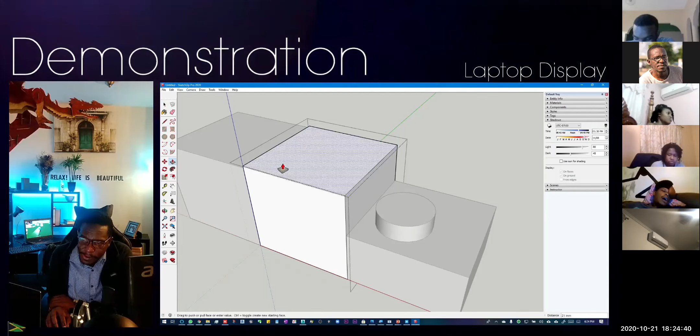And it is still a group. So to edit the group, all I need to do is double click to go inside the group, and then I'm able to make modifications to that group. So that is pretty cool.

Now, on the other hand, if instead of making it a group, I should make it a component, it's going to ask me to name the component. So let's call it box.

And now, if I try and copy this and paste, it will do the same thing again. It will still remain as independent objects. So that is great, and just like the group, I can go in and edit it by double clicking it. But what you'll notice with the component is what happens when you make adjustments.

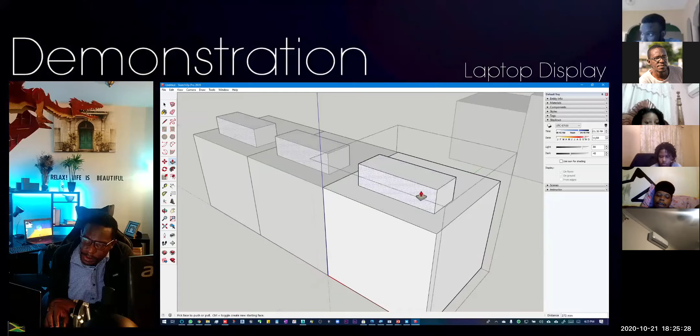Everything is the same, exactly. So a component will, they're all tied together and everything mirrors each other, and it stays separate.

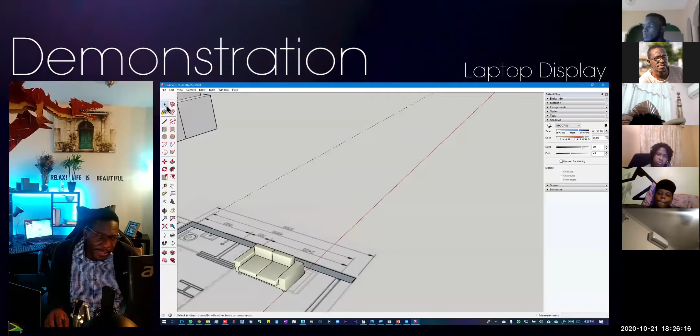So if I copy it here and try to make a modification to it, double click here, and let's say do some kind of badness like that, notice it will do it to all of the objects as well. So that's something to keep in mind, guys. Any object you download will be a component, and for components, they are mirrored in each other.

Now, if you want to turn something from a group back into just polygons, you right click and choose explode. Then it is back to being individual faces, back to sticky figures. And you do the same for the component.

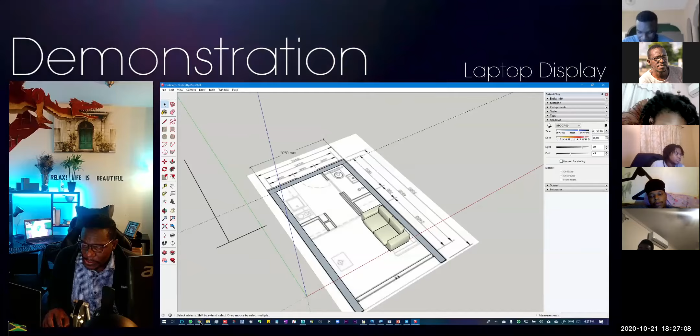All right guys, so it is at this point that I would let you build a model. Now remember, this video only teaches you up to this point. So if you're wondering how in the world am I going to get the windows or the doors, remember you can cheat by looking on the model guide here.

You won't lose marks, don't worry. You will just, you know, it's just your conscience. That's all I'm aiming for, right? Because I want you guys to figure out... It's a reference. Stop saying cheat.

So for example, if I look at this now... oh, right, there we go. So this is how I built it. Walls, that. I don't think I built it the most efficient way, so I don't even think you should follow this method.

Got the windows, the louvers in. What I would expect, it would be nice that you made your doors a component, but you don't have to. What I'm looking for in marking, remember this is 25 marks now, guys, so we're out of the little 5 and 2% marks, this is a big hitter. So what I've been looking for is, you need to give me a billboarded tree.

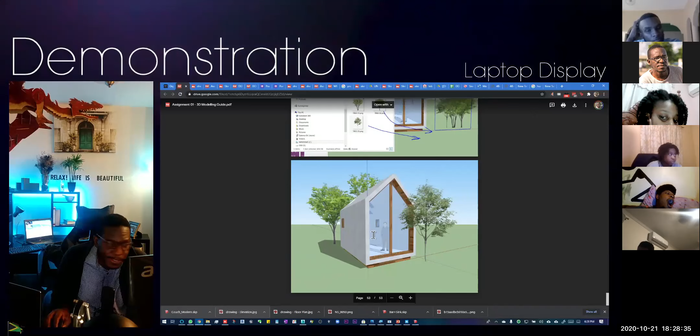You need to give me objects inside from 3D Warehouse. You need to have materials on your object. You can use any materials pretty much. You can match this if you want, but this should be some kind of wood. Your glass should be see-through, and the outside should be some kind of material, whatever you want it to be. Okay guys?

Okay, and you would submit the SKP file and an image file, and this would be part 2. Remember, part 1, you are tracing it in Illustrator. Part 2, you're giving me this. And in part 3, you're going to put it in Photoshop, which we will do next week.

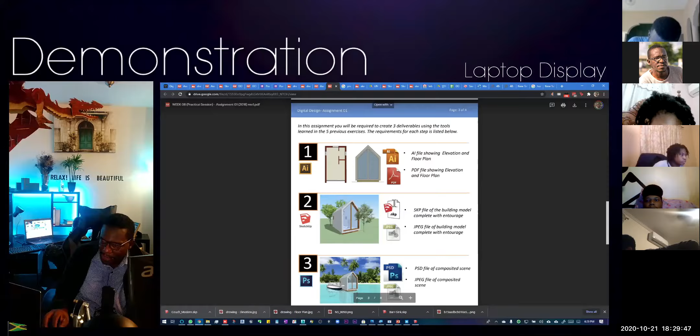So sir, you want the SketchUp file, or you want a PDF of the house itself? No, if you look on the handout... oh okay, right. So what I'm asking for is the Illustrator file and the PDF for the first section. Then I'm looking for the SKP file and a JPEG. And then in the final segment, I'm looking for your PSD file and a JPEG. Okay? Yes sir, all right, so I think you should be okay for now.

And look at that, that was only what, an hour and a half worth of class? Or was it 2 hours? No, about an hour and a half because class starts at 4, right? So it's not very long, but for the remaining hour and a half, you need to model this building, guys. Come next week, I'm just going to jump straight into Photoshop, so I would expect that you would have already had your model, right?

And we're going to look at how we can do some of these reflections, how to choose a background. You kind of do that already with the car, so I hope you remember, but just call it a refresher. So I expect next week's class to be even shorter, like a Photoshop refresher.

But usually for that class, a lot of us have modeling challenges. Some of you would have already started over twice or three times and hit a part of the model you can't get past. I'd expect you to tell me that next week. So we're going to dedicate half the class to just getting that done, to troubleshoot those having trouble with the model. For those moving ahead with compositing, you can do that in class.